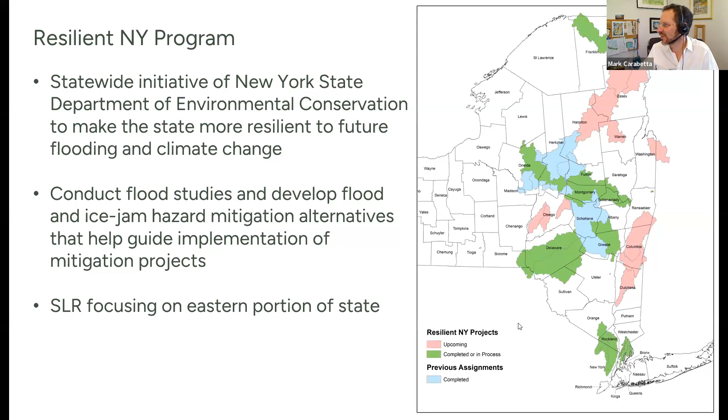The New York City DEP, after the big floods of Tropical Storm Irene that really devastated the Catskills region, put the local flood analysis program into place as a way to come up with scientifically based flood mitigation recommendations that could be implemented, and could direct funding for implementation of those recommendations.

And municipalities would hire firms to conduct a local flood analysis, and then would have access to that funding to implement flood mitigation recommendations. There are lots of examples throughout the DEP watersheds where LFA recommendations have gone forward to be implemented and constructed.

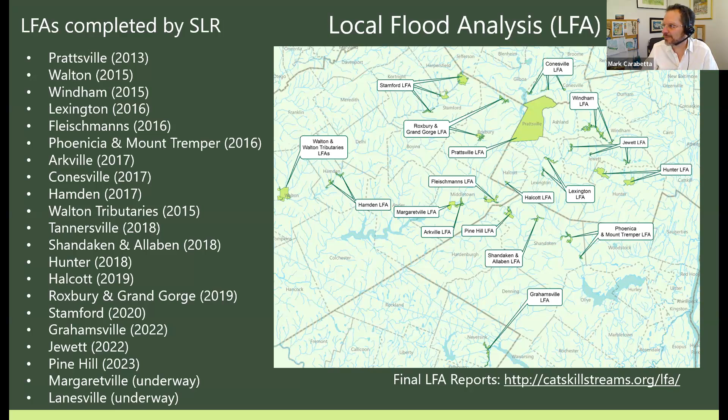A little introduction to our team at SLR. My office is in New Paltz, New York, and we've got a team of water resources engineers and water resources scientists. So we focus on work relating to rivers and wetlands, and a lot of hydrology and hydraulic analysis.

We analyze dams, and we sometimes work on dam removal projects. We design many channel restoration projects. We do lots of flood hazard mitigation analysis, and then sometimes design and implementation of those projects. And we spend a lot of time in rivers, both for work and for play.

I'll describe the process that we go through, whether it's an LFA or a Resilient New York study. We start with outreach to the community and data collection. We try and learn whatever we can about the watershed and flood history. We'll go into stream gauge information, FEMA studies, and previous reports.

We'll talk to people in the watersheds. Often there's an emergency response person or a DPW employee who knows more than anyone else about the flood history and what areas have been damaged in floods.

Those are the most critical people to talk to—people who have firsthand experience with the flooding. Sometimes there's expertise that exists in the watersheds, and we want to gather that information.

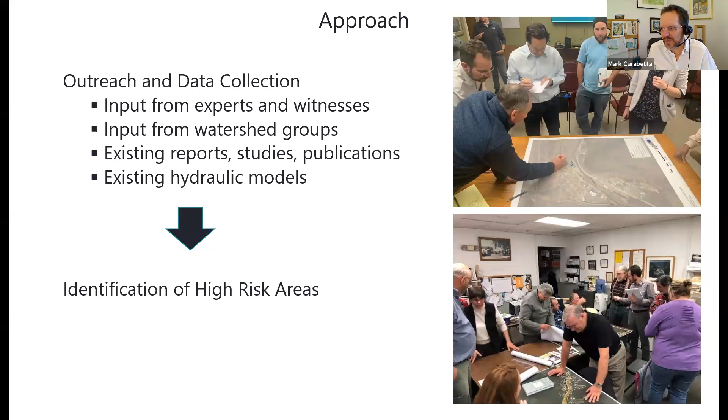The next step in the process is identification of high-risk areas. Through all the community outreach and everything we're able to learn, we're able to establish certain areas within our study area that have experienced repeated flooding—maybe a road intersection, or a certain neighborhood or business district that's been subjected to flooding in the past. While we're looking at the entire watershed, we focus in on these high-risk areas and do rigorous hydraulic analysis. I'll show you a map.

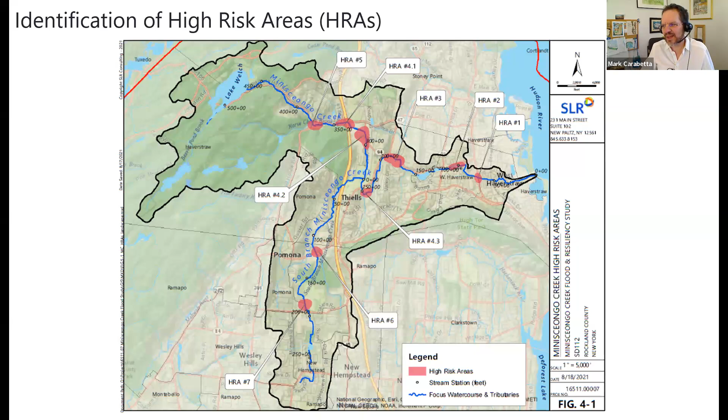The ones pertaining to the high-risk areas tend to be more specific. It might be that there's an undersized bridge, or there's some floodplain restoration that needs to happen to reduce flooding.

We always, as part of our hydrologic analysis, include an assessment of future flows given the impacts of climate change and the impact it's having on moisture in the atmosphere, and the potential for increased severity of rainfall events going into the future.

So if you look at our analysis and some of our conclusions, we'll look at, say, the 100-year flood event as it exists, as we understand it today—it might be a certain magnitude of flood. Then on top of that, we'll look at a future flow, which might increase the magnitude of that 100-year flood event going forward 50 or 100 years, and do that same evaluation under these future flows.

Then we'll do lots of hydraulic modeling, hydraulic analysis, develop flood mitigation strategies, and the end product is a flood mitigation report that looks at different flood mitigation alternatives, makes flood mitigation recommendations, and is made available to the community. It's important to understand those recommendations could then be used to apply for funding to design and implement those flood mitigation recommendations.

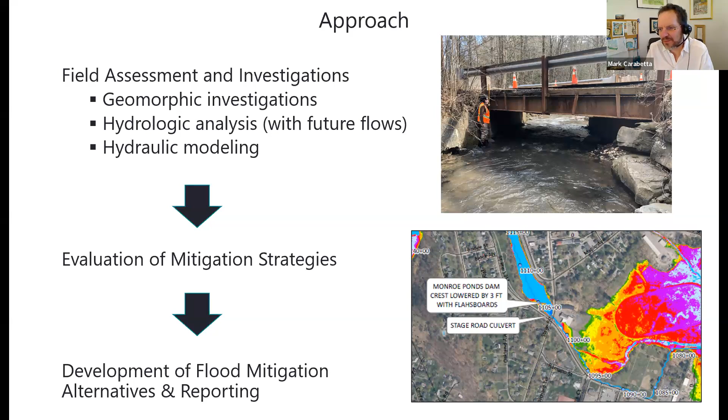So I'm going to go through this in a bit of detail, and I'll provide some examples to demonstrate.

We're able to see the difference between existing conditions and if that bridge or culvert didn't exist. It's a good way of analyzing it for us.

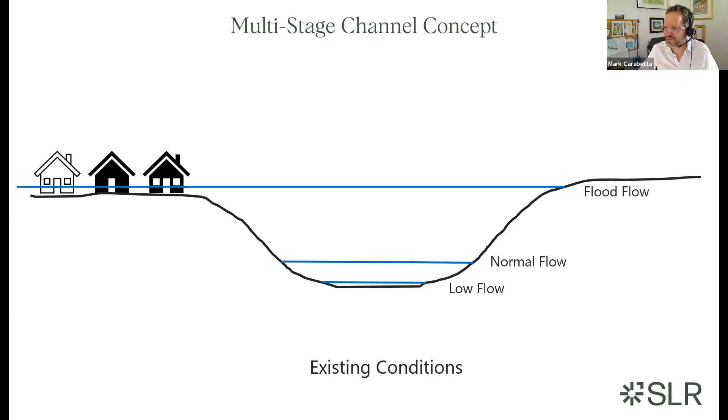So in this case, in our analysis, we'll determine what's the appropriate size of that channel. The main channel should be able to convey the bankfull flood event, which is a flood event that occurs every 1 to 2 years, and the channel should be adequately sized.

Channels don't just convey water, they convey sediment. If you over widen the channel, it may convey a flood flow, but it won't be adequate to convey the sediment, and that channel will fill up with sediment because it's overly wide.

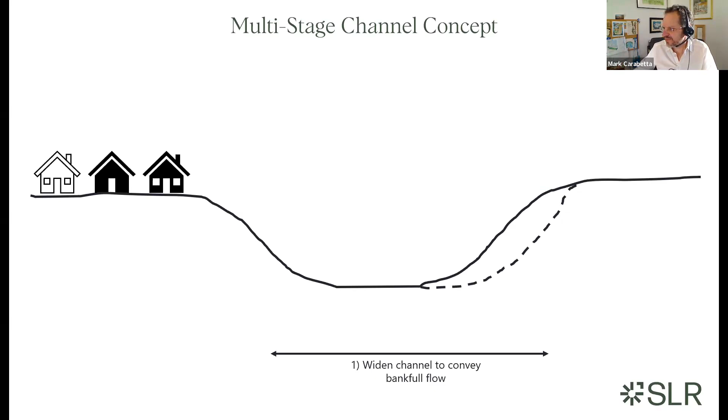In this case, we want to right size that channel to convey bankfull flows, and then create floodplain. That may be through a floodplain bench or a more extensive floodplain, and that floodplain conveys flows that are bigger than the bankfull event. That's when water spills out onto the floodplain and conveys those flood flows. And then we create a low flow channel to concentrate the low flow so it's not spread out and shallow during low flow events. It's good to support aquatic habitat.

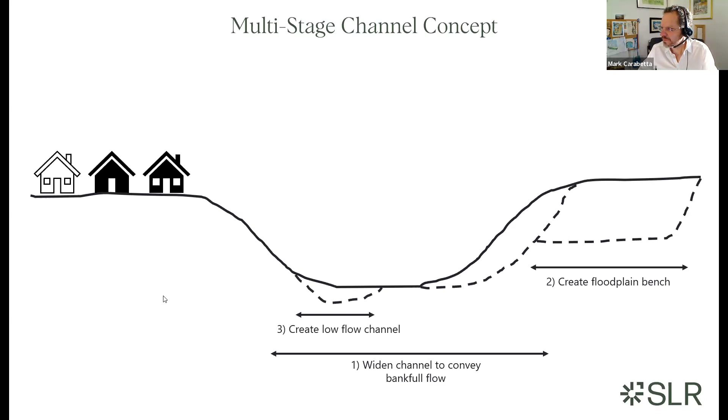So once that's constructed, it looks something like this in cross section. Now the low flow is concentrated in the low flow part of the channel. A bankfull event fills up the main channel, and then a flood event conveys the flood flows. And those homes are no longer subjected to flooding in a big flood event.

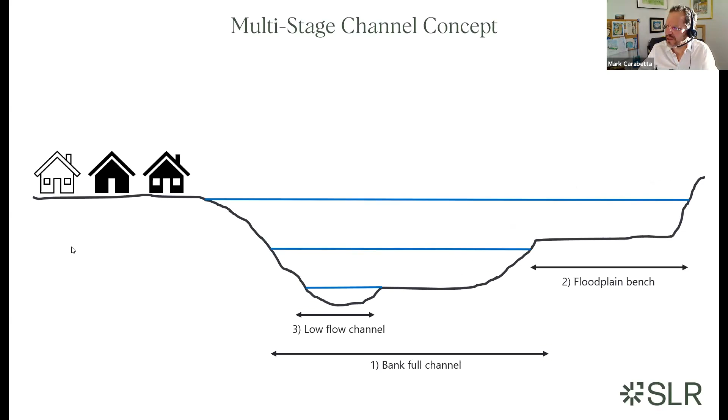What we see in some situations is there's homes on both sides, and we can go through a similar process here with the low flow channel, the bankful channel, and the floodplain. In this case, we've reduced flooding from this neighborhood, but it's been at the expense of this home, which had to be relocated in order to construct the floodplain bench. And we often see that.

We don't have the space in some of these developed communities to convey the flood flows, enhance the floodplain without a component of managed retreat where some homes are being relocated. We're often making recommendations that relate to managed retreat.

That term is often being used - today's current conversations about flooding often include the term managed retreat, which we define as the purposeful, coordinated movement of people and buildings away from the risk. That may be relocation of buyouts and relocations of individual buildings.

I have an example here. This is from our study on the Ramapo River. There's a section of Main Street and some businesses that are prone to flooding. The green line represents the 10-year flood event, and the red line represents the 100-year flood event, and the orange, the future flows 100-year flood event.

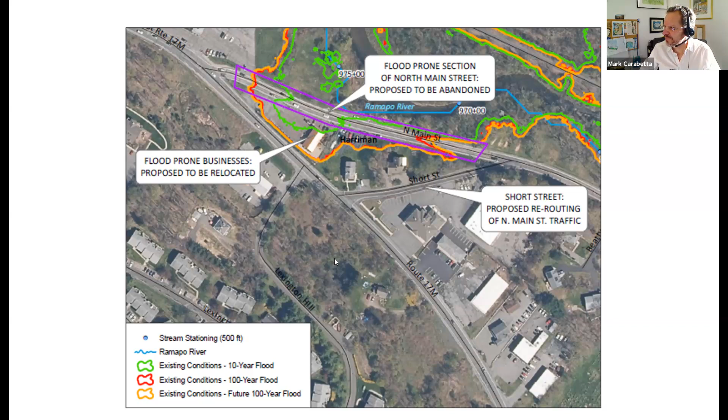I also wanted to give an example of when we talk about undersized bridges and how they contribute to flooding. I wanted to walk through that example a little bit.

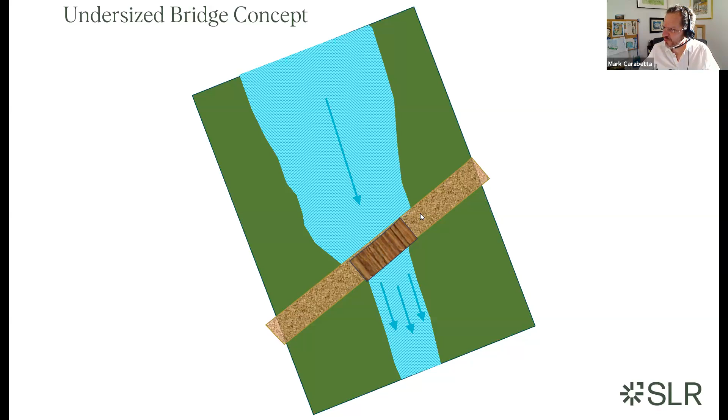So in this case, we're looking down on a bridge. You can see the bridge is sort of concentrating flows as the water passes through the bridge. This may be a pedestrian bridge, it might be a railroad crossing the river.

In the upper left, you see the bridge sort of now in profile. The river is flowing under the bridge, seems to be passing under it just fine. But under higher flows, that bridge may not be adequately sized and may cause a hydraulic constriction that causes water to back up. Now, if it's a steep water course and it's just a small bridge, that increase in water surface elevations may only extend a few tens or hundreds of feet upstream, and it may not be impacting anyone.

It may subject the bridge to scour. It may mean the bridge is going to overtop or wash out. But if that's a large bridge and it's a fairly flat water course, that impact of the undersized bridge and that increased water surface elevation may extend quite a ways upstream, and it may contribute to flooding. And that's part of our analysis.

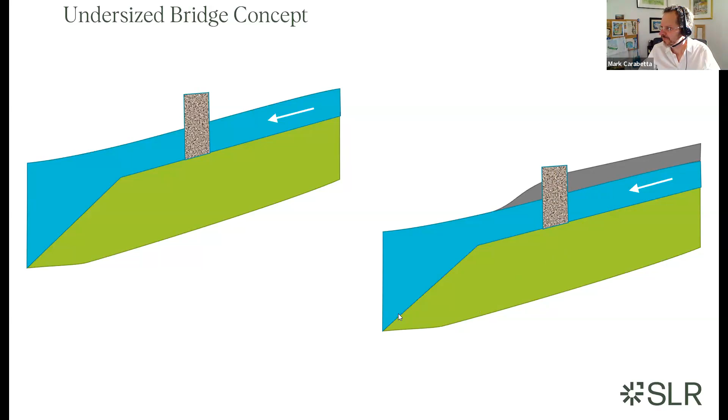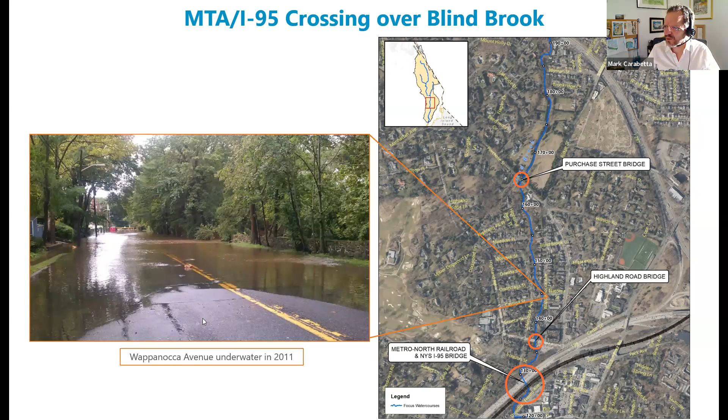Here I show an example on Blind Brook in Westchester County. So in the aerial, you'll see here's the brook flowing south. And here you have I-95 and you have the Metro North Railroad next to each other crossing over Blind Brook. And upstream of this crossing, you see during Tropical Storm Irene, there was flooding of that neighborhood, which happens from time to time.

This is for that same area, this is the profile for Blind Brook from the FEMA flood insurance study. And these are widely available, the flood insurance studies for each county. And if you look through those, you'll see these flood profiles. And it takes a little study to understand these.

I've had to piece together two separate sheets, but here you have the profiles of Blind Brook under different flood events. So this top line represents the 500-year flood event, and then this dashed line is the 100-year flood event, and the one under that's the 50. This is that railroad and I-95 crossing.

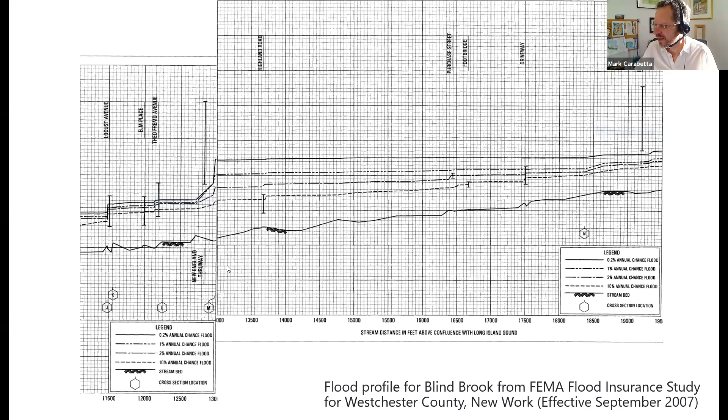And when you see this large head loss or drop in water surface elevation at a bridge, and then this long sort of straight lines going back from the bridge, that often indicates that crossing is hydraulically undersized. And this caught our attention during this flood analysis, and we wanted to look at that more closely. So here's the crossing.

Over the top of this crossing is I-95 and the railroad. The railroad crossing was built over 100 years ago, and then when I-95 was built, I think in the 1950s, they used that same crossing but extended the culvert, lengthening it to span under both I-95 and the railroad.

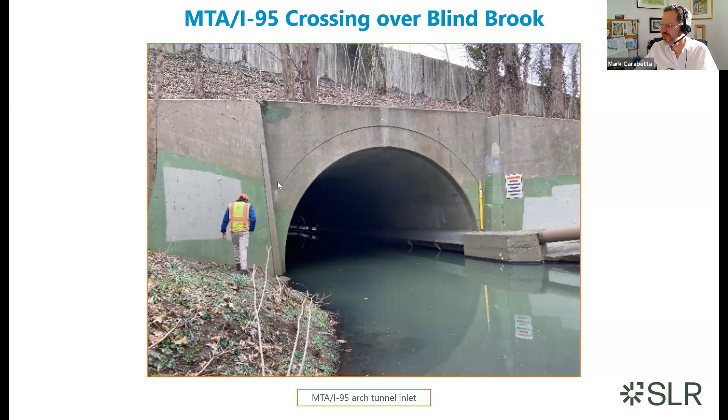So there's a very flood-prone neighborhood upstream of that crossing. Now, this presents some challenges with this recommendation, because obviously it would be very expensive to upsize that crossing.

Railroad crossings are especially challenging because the grade required has to remain very flat for railroads to cross them. You can't put in a bit of a hump like you would if it were traffic going over it.

Also, because so much water is backing up behind this crossing, if you were to upsize it, there's the potential for increasing flooding downstream of the crossing, potentially increasing peak flows downstream. We come across this situation quite a bit in our studies with undersized railroad crossings, and it presents a real challenge for these communities, sort of an ongoing conversation.

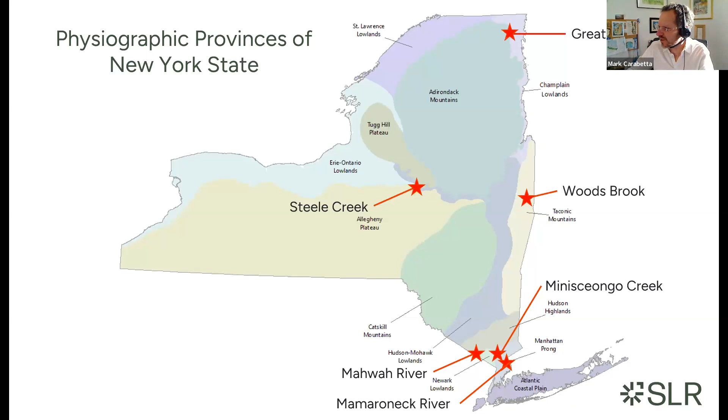I'm going to start in the north with the Great Chazy River analysis we did. These are tributaries in the Adirondacks that flow down into the Champlain lowlands and into Lake Champlain.

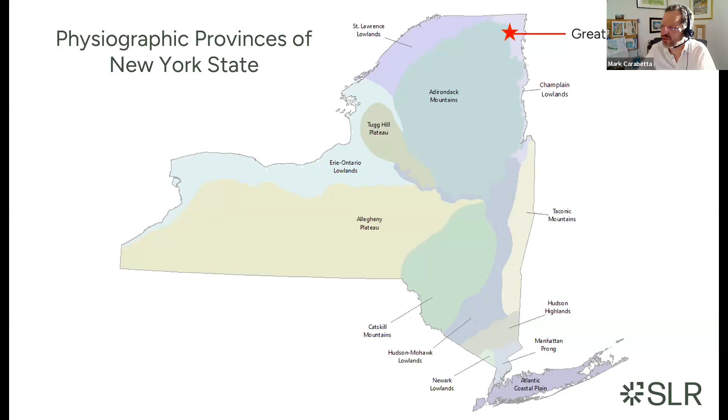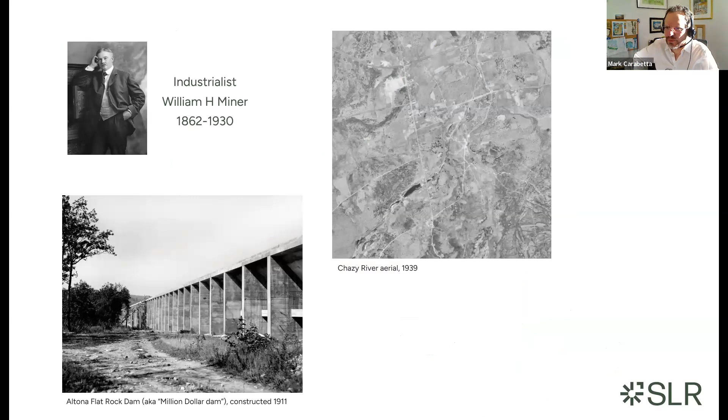Those watersheds, the Great and Little Chazy watersheds, have been greatly impacted through the work of industrialist William H. Miner, who built many hydropower dams through these watersheds in the early part of the 20th century. These have had a great impact on the watershed, as you can see in these photographs. Many of these still exist today, including this big powerhouse that was built in the 1920s.

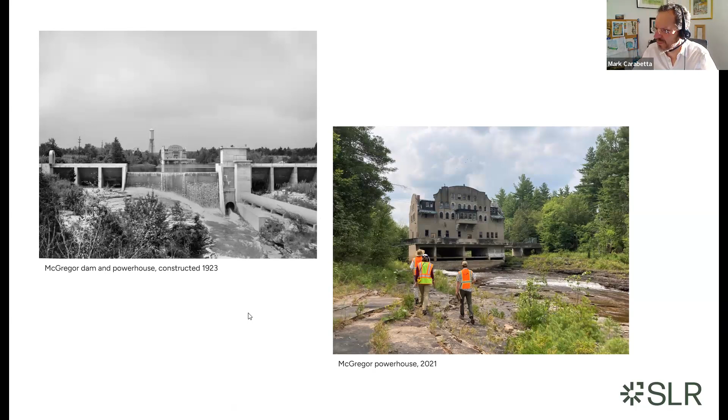Our staff visited this same powerhouse a couple of years ago, and you can see the penstock running right down the river. This was done in an era when environmental protection and concern for the rivers was very secondary to these industrial developments.

So we did a lot of analysis in this watershed looking at ice formation. Ice jamming is a big problem in these watersheds - ice moves down into these communities, gets jammed up, and then even in a fairly modest bankful flood event, combined with the ice jamming, you'll have pretty substantial flooding. We analyze not only the ice jamming but also the formation of the ice and where it forms. We find there's a lot of ice formation on the slack water that forms in the impoundment of a dam.

So the presence of the dams and these impoundments really contributes to all that ice forming and moving downstream. These dams are defunct - many are derelict dams. They were created for hydropower but are not needed in today's day and age, so often we're recommending the removal of these dams.

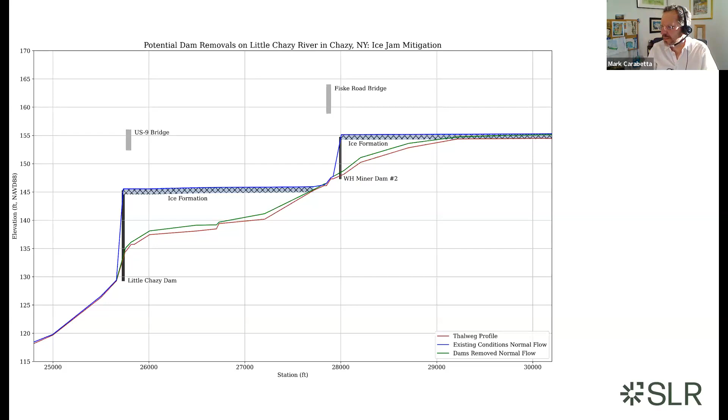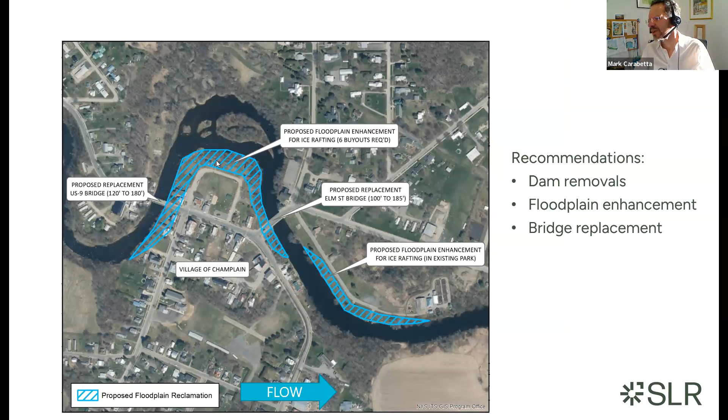That ice forms and moves downstream. This is the village of Champlain, and you can see all the ice moving. As it moves downstream, it encounters the backwater of the lake levels in Lake Champlain, which extends up the Chazy River. Where that happens, the ice runs aground and causes flooding as it flows through the village of Champlain. We've made recommendations in addition to the dam removals, including upsizing undersized bridges where ice jamming occurs, and creating ice rafting areas—floodplain areas where ice could be pushed out rather than moving into populated areas and damaging homes and businesses.

Now I'll move to Steele Creek, which is in Herkimer County. Steele Creek is a tributary to the Mohawk River and the Erie Canal. I like to talk about this one because it's an example of flood mitigation recommendations that the community then applied for funding on, had further analysis done, and then designed and constructed a flood mitigation project.

This is Steele Creek looking upstream. You can see in the foreground the Remington Arms Dam. This used to provide water and power to Remington Arms. You can see the remains of a little entrance to a race where water would flow down to Remington Arms, which manufactured firearms even during the Civil War period for the Union Army and has existed for a very long time. But that dam is no longer serving a purpose.

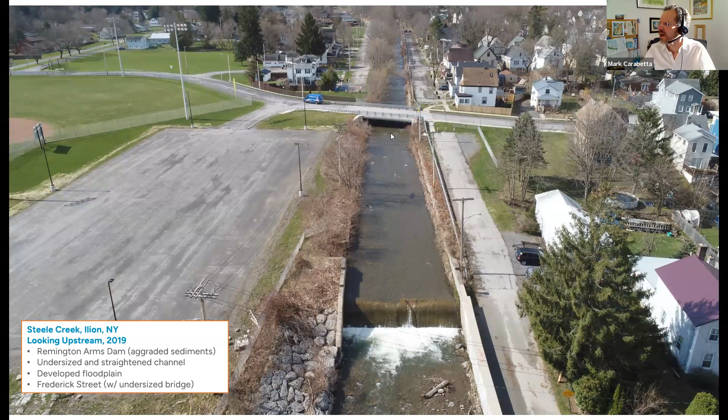There's an undersized bridge crossing. Looking upstream at the project area, you can see it's a very developed floodplain. The channel has been straightened. There's no floodplain, and there are roads on both sides really pinching in the channel.

Looking back through historic documents, we found from 1894, over 100 years ago, that many of these same problems existed, and they really understood the problem was being driven by the presence of this dam. Some of this language is really interesting—during floods, streets were torn up and otherwise injured. Not just damages to roads and property, but also considerable sickness relating to the flooding, which was positively dangerous to limb and life. So we found that this problem has existed in this village for over 100 years.

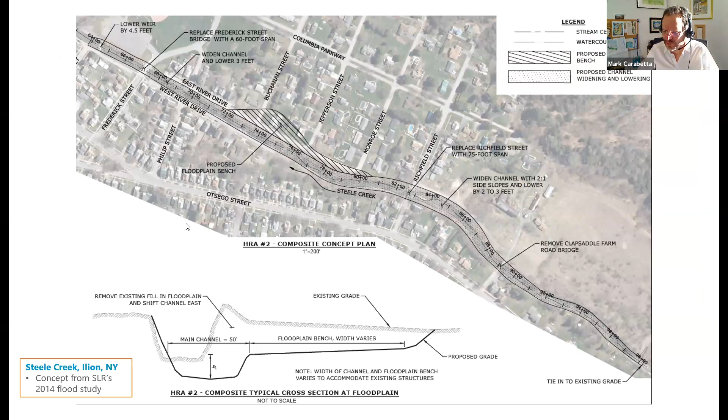As part of our flood study, we drew a lot of conclusions and made a lot of recommendations to reduce flooding in this area—a multifaceted strategy for reducing flooding. We laid out this concept sketch, which the village was then able to acquire funding for to design and construct this project.

It started with property buyouts. Frequently flooded properties were acquired. People were willing to take buyouts. Those homes were demolished and removed. Some of the roads that serviced those homes were either fully removed or portions of them were removed, narrowed and made into one way to make more room for the river.

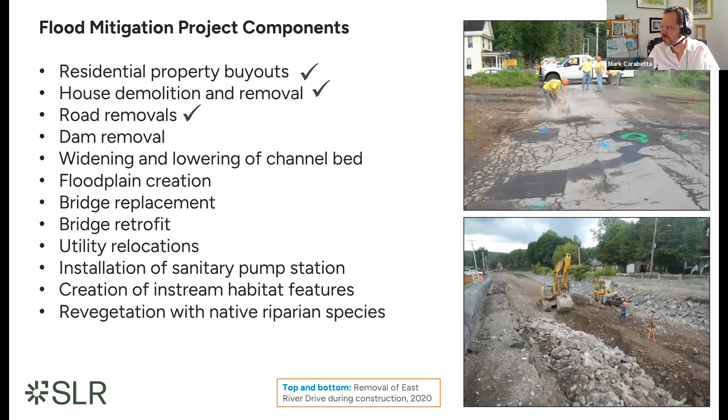That Remington Arms Dam at the downstream end was removed. This dam was raising the channel bed up approximately 13 feet. After the dam was built, the area behind it gradually filled in with sediment and cobble right up to the crest of the dam, and that raised channel bed was contributing to flooding.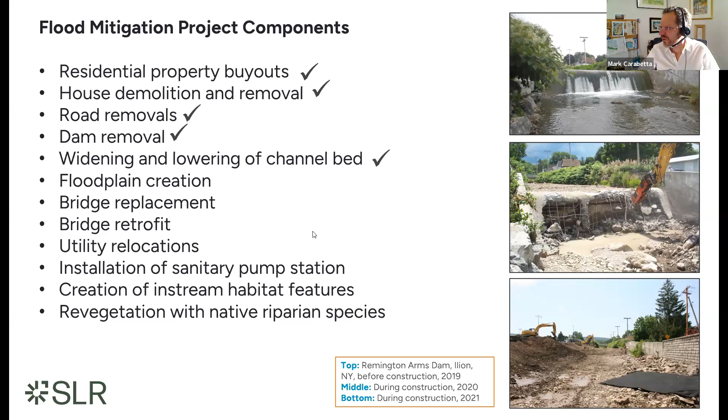The channel upstream of the dam was lowered and widened so it could convey flood flows, and floodplain was created along the sides of the channel. This is looking downstream in that whole area—it's still pretty raw because it's under construction, but that whole area is now floodplain to convey flood flows.

A bridge was replaced at Richfield Street at the upstream end of the project area. The undersized bridge that would cause flooding during the 25-year flood event was replaced with a bridge that could now convey the future 100-year flood event.

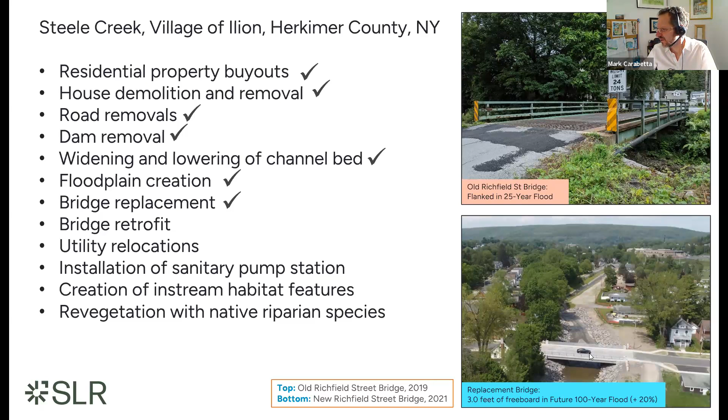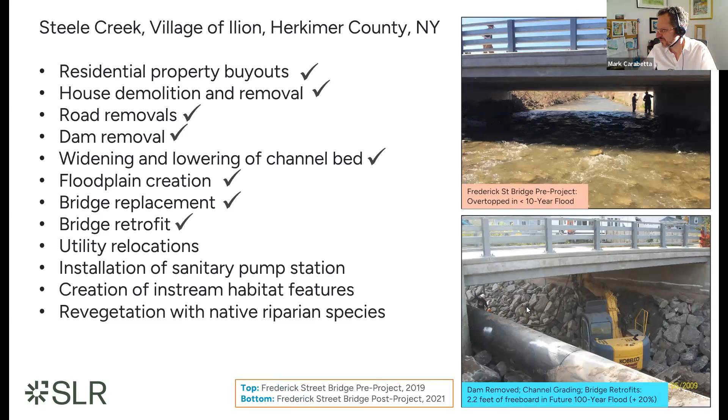An existing bridge at the downstream end was retrofitted to convey more flow. The channel was deepened under the bridge, just upstream of where the dam was removed, so now it'll pass the 100-year flood event.

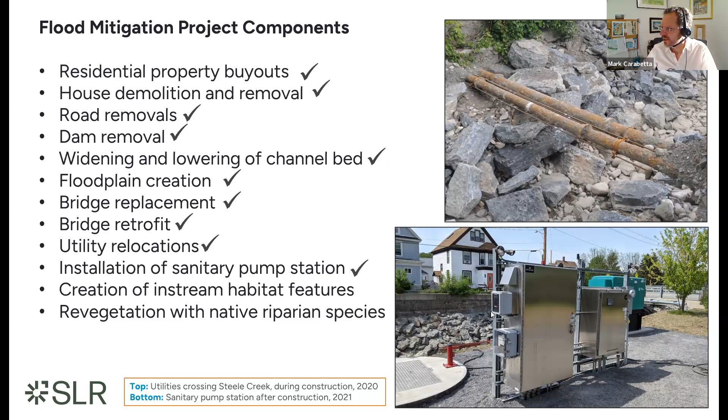Because we lowered the channel bed, we had to relocate utilities that passed under the creek, including installing a sanitary pump station, since the gravity sewer had passed underneath the creek and had to be relocated. We also created in-stream habitat—many stream features like pools and riffles had been lost, and those were recreated. The floodplain was then revegetated with native species.

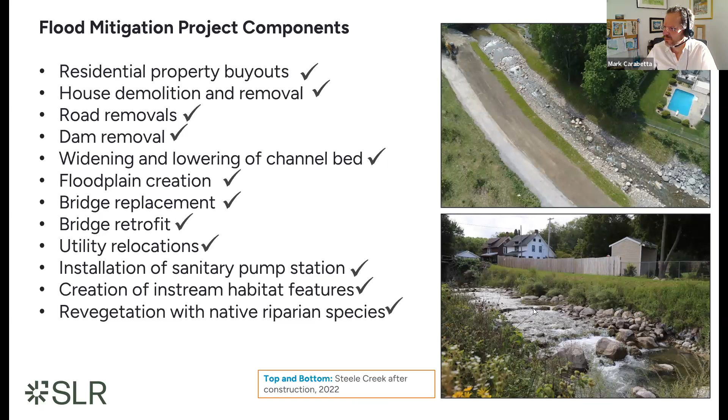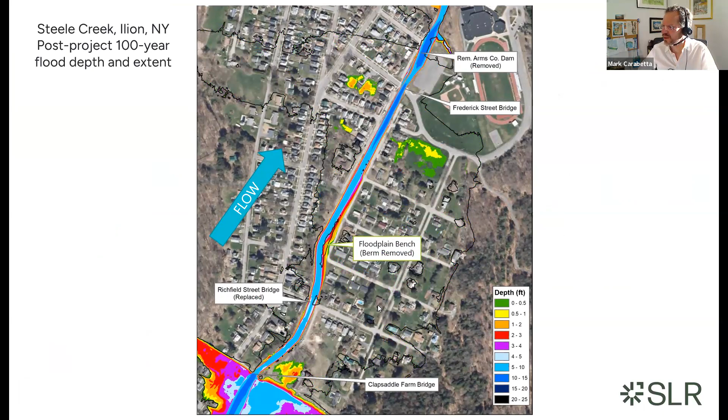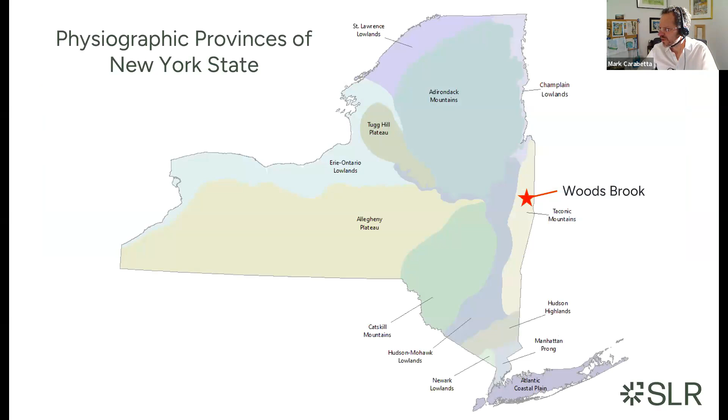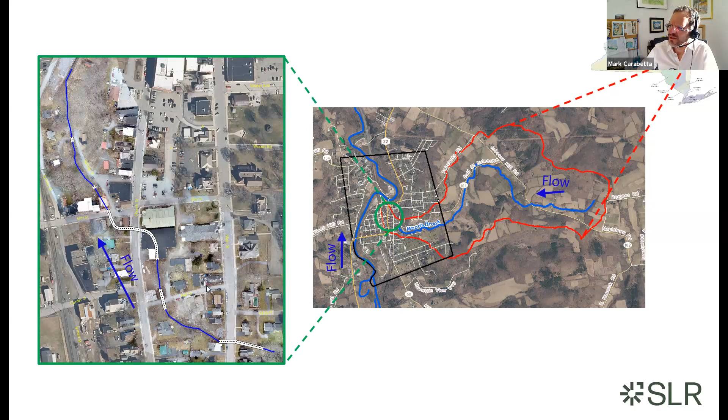Woods Brook is in Hoosick Falls. It's an agricultural watershed that flows down into the village of Hoosick Falls, and the water course goes underground for much of its length. We worked with the community and looked at several scenarios, which ran the gamut from daylighting the creek, removing buildings, to replacing culverts where it flowed under streets.

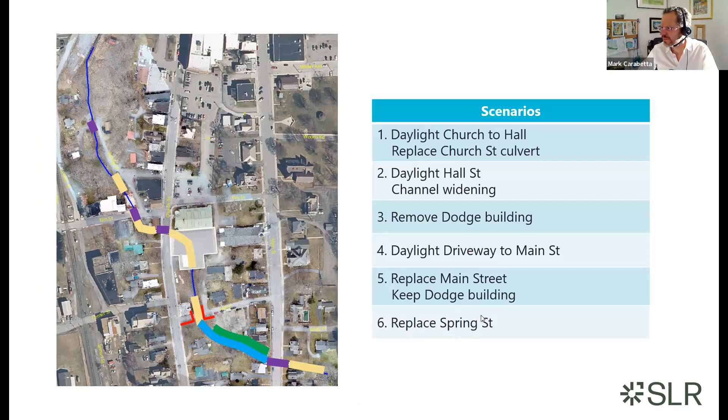There's a range of scenarios we worked through with the village, depending on the willingness of property owners to take buyouts. The one the village chose had a combination of improvements: culvert upsizing, daylighting of the channel, floodplain restoration, and removal of buildings. One building, called the Dodge Building, is unlikely to go anywhere at this time, so that's left in place with the channel flowing underneath it. But you can see, comparing the left image to the right, a pretty substantial reduction in flooding.

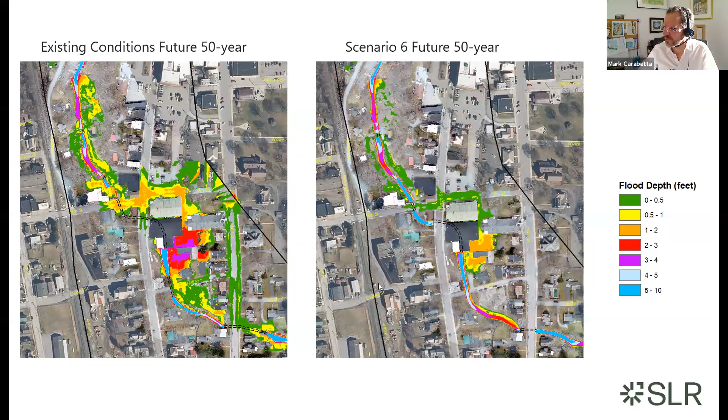This is the 50-year future flow that is modeled, and we see quite a reduction in flooding if those recommendations are implemented. I'm going to now jump down to Minisceongo Creek. This is in Rockland County, at the Garnerville Arts and Industrial Center. It's sort of a revitalized area—it used to be old mill dams, and there are now a lot of different businesses, vendors, and artists in these buildings. During Tropical Storm Irene, it was devastated. The channel actually flows between all these buildings and did a lot of damage as sections of buildings collapsed.

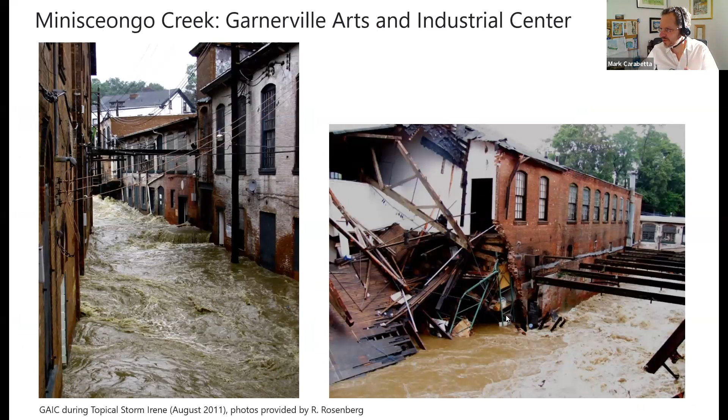This is in plan view, and as part of our analysis, we looked at the influence of this building that sits on top of the creek, which was added at one point during the development of these properties. This gets all jammed up with debris and causes a hydraulic constriction. It's just downstream of a dam, and we looked at modeling what would happen if we removed this building.

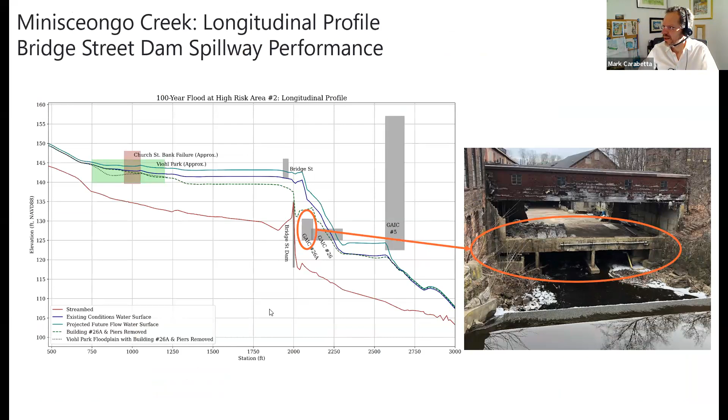Would that reduce flooding? This is the output of our hydraulic modeling during the 100-year flood event, and it's pretty close to what happened during Tropical Storm Irene—water spilled out of the channel, got onto the road, and flowed all through the Arts and Industrial Center. We modeled it with that section of building removed, and it greatly reduces flooding, keeping the water in the channel during a large flood event. We spoke with the business owners, and that was a viable option for them—to remove that building.

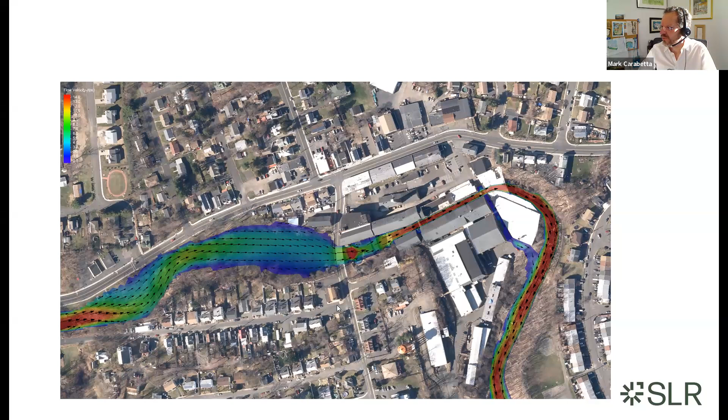I'll jump down to the Mamaroneck River, probably the last one I have time for. The Mamaroneck River watershed includes a tributary called the Sheldrake River, which flows through a very densely populated area of the village of Mamaroneck. Lots of flooding gets triggered through this area due to the undersized channel—it's simply not large enough to convey flood flows. It's also subject to backwater from the Mamaroneck River, which backs up and influences flooding on the Sheldrake.

So we had a two-pronged set of recommendations here. The first was to create floodplain and replace undersized bridges along this section of the Sheldrake, which would provide some modest flood reduction. Then, as a longer-term plan—shown by the dashed yellow line—a greenway or linear park would be created along the Sheldrake, consisting of the river and floodplain adequately sized to convey flood flows. It would require taking some buildings, and it's presented as a long-term strategy where the village could acquire property over time and reduce flooding.

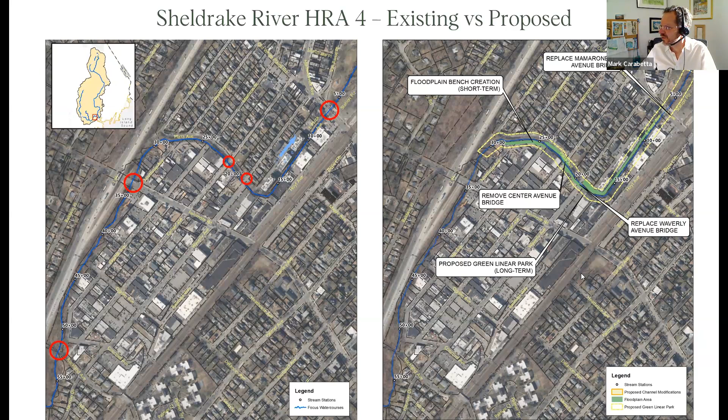So here on the left, you see the 10-year flood event and the flooding that it creates. You can see the cooler colors are the deeper flood flows, or deeper flood depths, and then the warmer colors are the more shallow flood depths.

And then if you contrast that with the image on the right, it shows the flood reduction during the 10-year flood event with that first scenario implemented with the floodplain benches. And then this shows that longer term strategy with that sort of linear greenway created along the Sheldrake.

Now, the reason we're showing the 10-year flood event here, there's quite a bit of reduction, but during larger flood events, the backwater from the Mamaroneck River actually backs up and starts to flood this area regardless of these improvements. So it's an improvement that's going to have great benefit during modest 5-year, 10-year events, but once you get to the big flood events, then you need to address some problems further downstream around the confluence with the Mamaroneck, which are also recommendations that we made during our study.

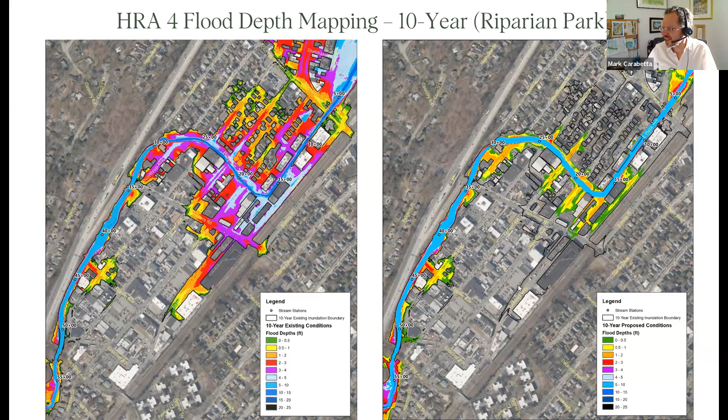So sometimes there's a certain prioritization that needs to occur in the way these recommendations are implemented.

And Lauren, Emily, why don't I pause right there and just check in with you? I think it's probably time for me to stop. I have like 1 or 2 more examples, but I think that's probably... Yeah, we've got some good questions here, so I think we should jump over to those.

Thank you so much, Mark, for walking through those examples and the practical explanations of how some of these flood reduction strategies actually work. I think it's been really helpful. So we've got a couple questions about some of the data, some of the modeling that I want to take first. So the question about some of the information that you use to inform the reports.

Do you use NAACC records for data collection around bridge and culvert conditions? We do when it's available.

I know we've worked with the DEC and the various soil and water conservation districts. We often have access to the NAACC data, and that tells us, based on the NAACC visits, if the culverts are hydraulically undersized and if they are barriers to fish passage. And that'll often tell us that this culvert's been identified as undersized and we need to take a closer look at it, and then we'll do our own analysis of those culverts.